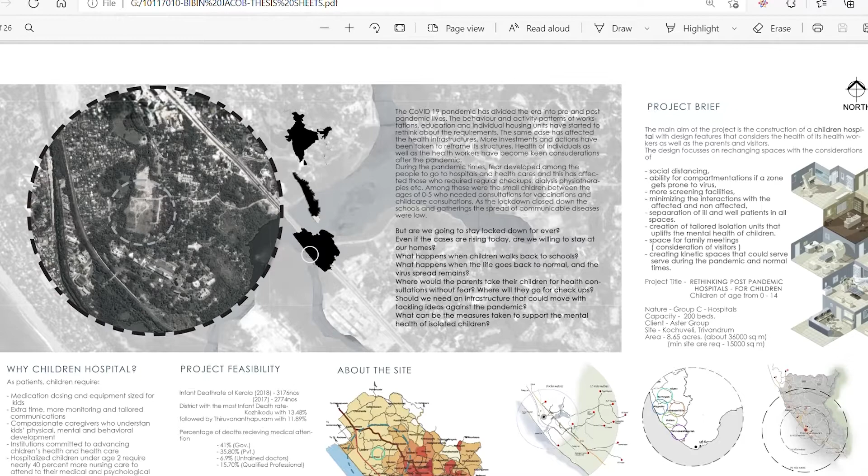Well patients, vaccinations, checkup operations, and regular acute disease children patients were confused about what to do, and cases have been reported about the denial of care to regular patients.

The following data shows the bed requirements and available beds in Trivandrum, the capital city where my design comes up. The density maps the reachable possibilities from districts due to NH, and statistics of birth rate show the requirement of a childcare hospital within the site.

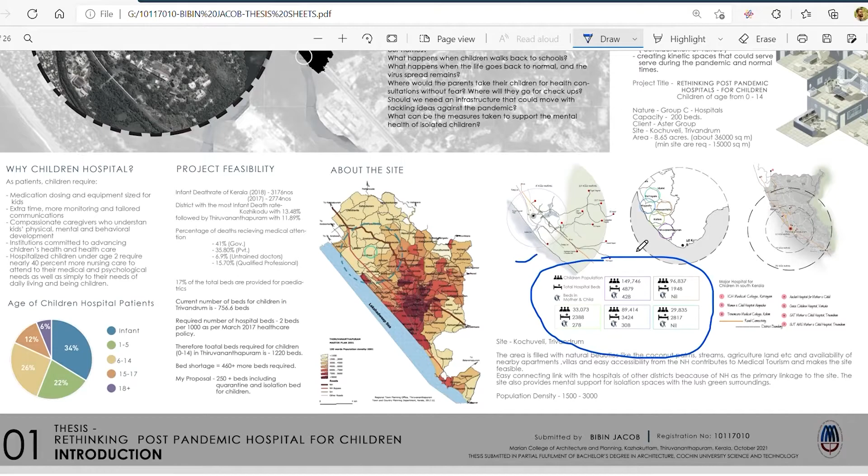During the development of the project, I worked on Rainbow Children Hospital as the major case study, to learn about new facilities, the SAT hospital for social improvements and working, and literature case studies for designs and concepts. The Rainbow Children Hospital is located in Banjara Hills, Hyderabad.

With a built area of 16,000 square meters, it runs with 70 plus doctors, 300 plus nurses, and 100 plus service staff. The site is located within a lower population density area in Hyderabad, creating a different environment and healing nature to children's care away from busy, noisy zones.

The figure shows easy accessibility due to the main road abutting the site that directly connects to the NH. The nearby metro stations, hospitals, and clinics help in easy accessibility and fast referrals with other care centers if needed.

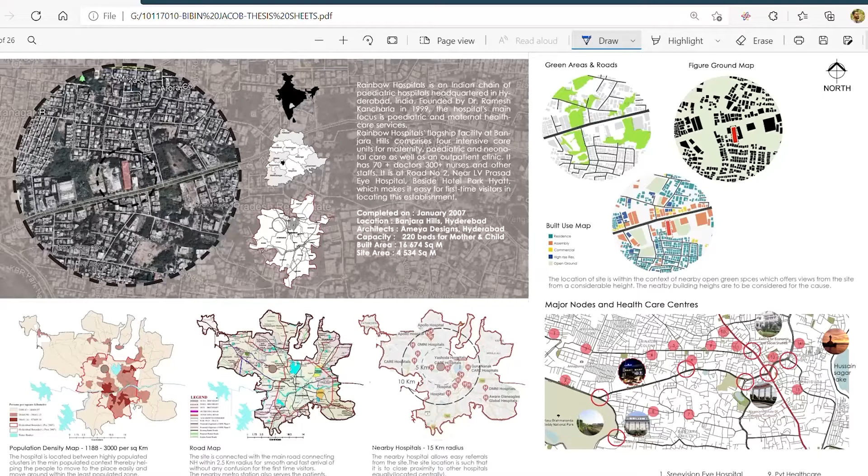The major wind direction from the west is clearly gained by the building due to the open spaces on the west, as seen from the figure ground map. The green areas to the west and east act as viewpoints from the site.

The built use map indicates the busy roads and traffic that could build up within the area due to the presence of assembly and commercial spaces.

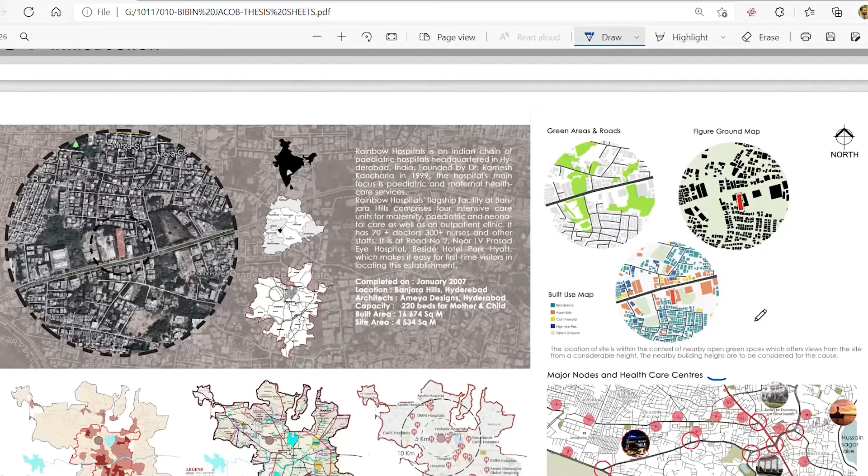The building is designed as three zones: the child care, common requirements, and the maternal care. The maternal care receives well patients and thus is separated from other busy areas where disease could likely spread.

The building orientation is such that it receives west winds for IP beds provided on upper floors, while the OP clinics, which are areas filled with infected patients, are zoned away from the wind on lower floors where wind gain could be less due to the presence of nearby buildings.

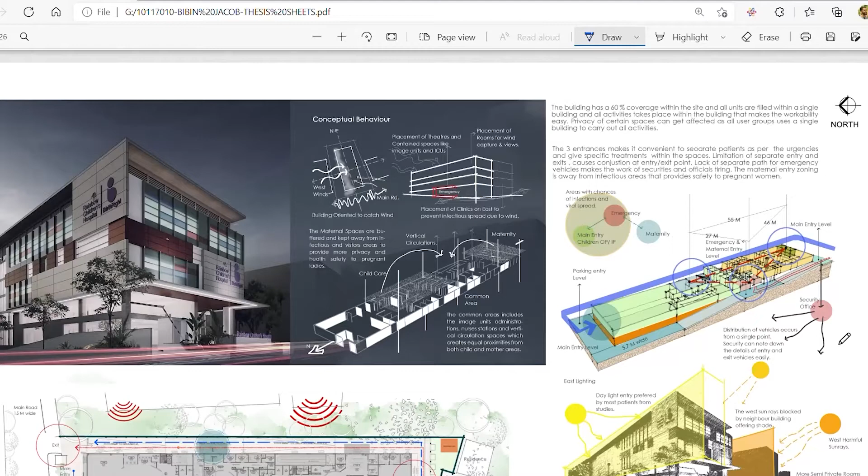The site plan indicates the three major entrances to the site. There is also a sub-road about 20 meters below the main road level for service vehicles.

The separate ambulance entries allow quick transport of patients to the emergency entry, which is a separate entry away from the other three entries into the site, to avoid contact with other vehicles and prevent other visiting patients from interference with critical cases which urgently require medical care.

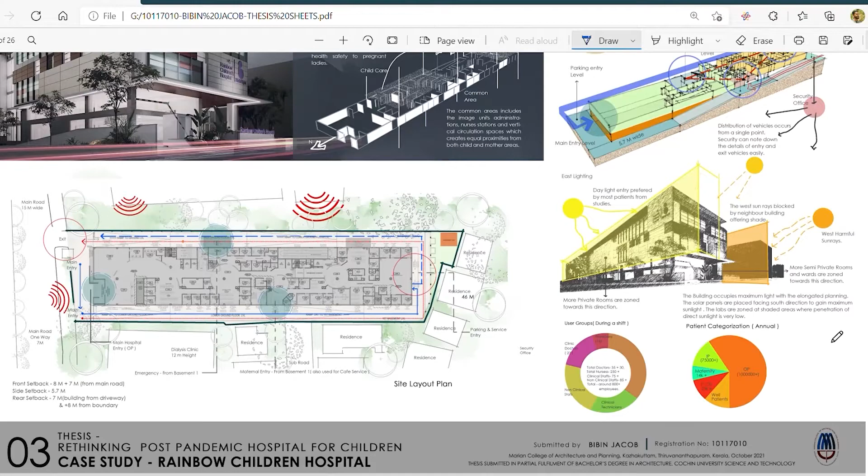VIP private rooms and IP beds are zoned towards the east direction where sunlight is received. However, the free facades used for hiding the service lines limit the sunlight entry and wind entries at certain locations. The west sun is blocked by the nearby building, creating shade to the main entry points, that is the OP and the maternal.

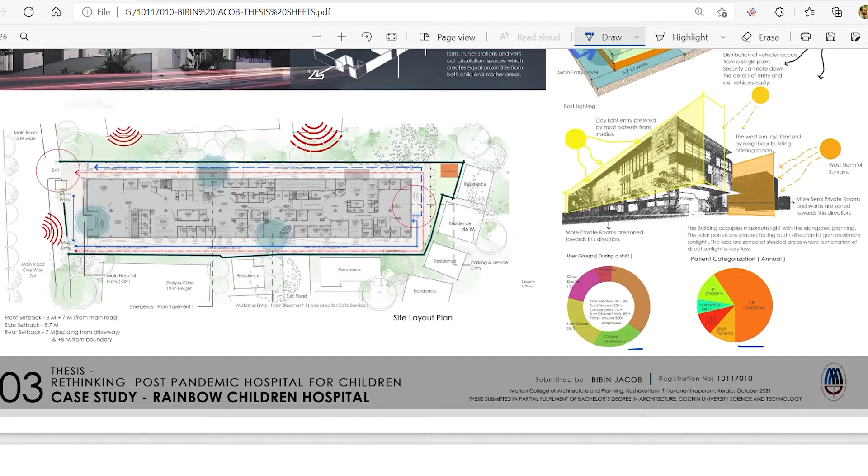User groups and patient categorization are shown here. The physicians are the full-time doctors managing the casualty. There are clinical and non-clinical staff, where doctors, nurses, pharmacists, etc. come under the clinical staff category, while cleaners, office managers, biomedical officers, securities, etc. come under the non-clinical category.

The ground floor area has the OP and the place from where distribution to other areas happens, and is the most densely used floor. The entrance, lobbies, pharmacy, and enquiry are zoned at the entry level from where each one gets separated. The entrance is also adjoined with a play area near the main lobby and waiting area.

The separate receptions for each department are placed linearly, connected with the main corridor, which helps people understand their destination. The separate receptions also help in controlling and regulating activities within each zone. The people moving in through the main entry include well patients, that is for vaccinations, baby checkups, etc.

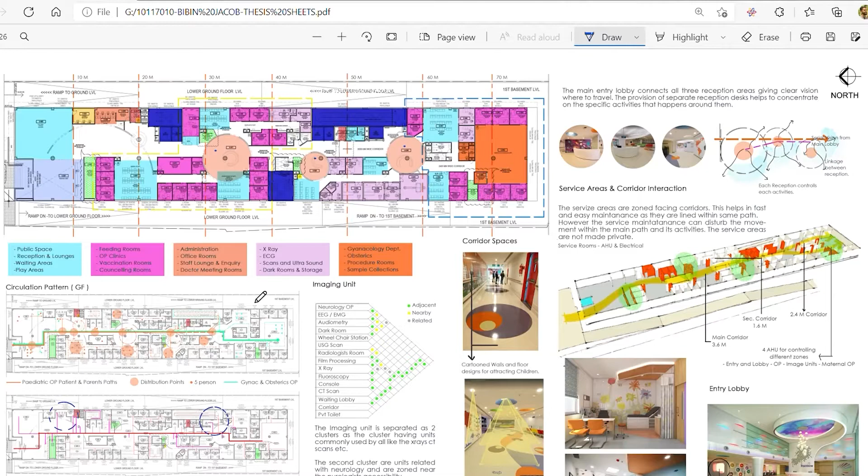Patients with viral disease and patients with acute care all use the same entrances, the same corridors, and the same waiting areas, which can lead to viral spread. This has caused the complete shutdown of the hospital during the pandemic after many were tested positive, including the staff.

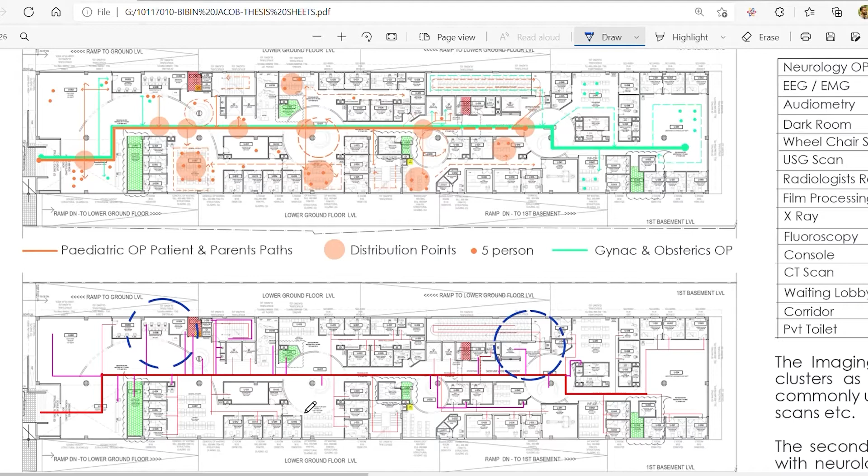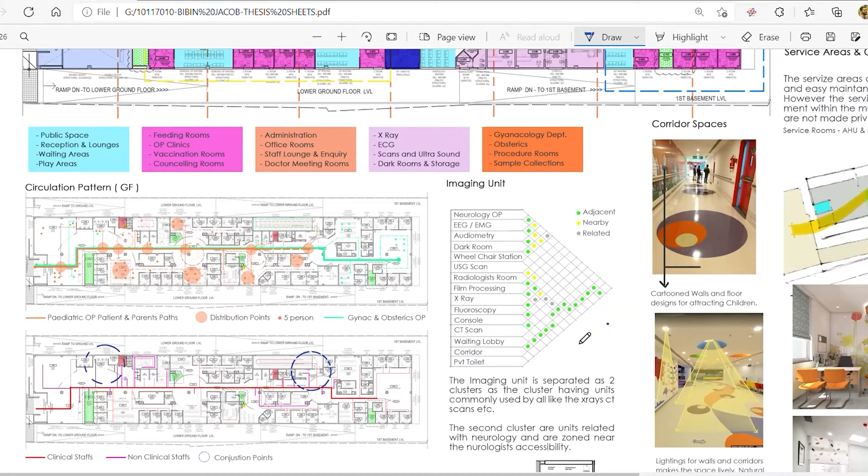The proximity chart shows the nearby and related facilities. The service rooms are shown towards the main corridor with lifts aligned along them, creating the corridors a congestion space where waiting for going to different floors, cleaning, services, managing, and the main traffic of patients occurs. The placement of stairs towards the corridors and service areas and lifts to the peripheries could have prevented this congestion.

The corridor spaces, clinics, and waiting areas have created playful paintings and floorings for depicting a children's behavior.

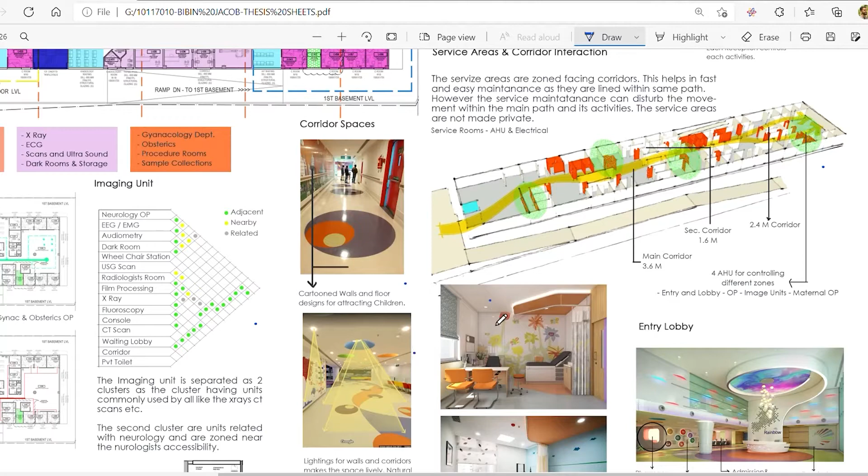The imaging units have been separated into two clusters: X-rays and CT scans, mainly controlled by radiologists, and others related to the neurologist, shown towards his consultation rooms. The typical consultation room includes the observation bed, wash and meeting areas.

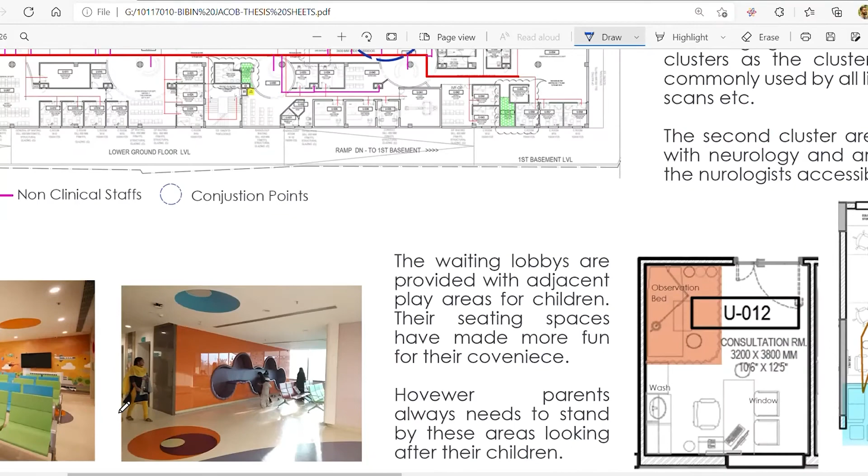The waiting lobby is adjoined with play areas where parents always have to stand by these areas to look after their children. The emergency entry, separated by levels on the lower ground level, is designed accurately to the patient needs.

The entry is adjoined with the main lobby, from where the bystanders move to enquiry or waiting areas, and the patients are taken into the triage units, where they are classified based on their seriousness.

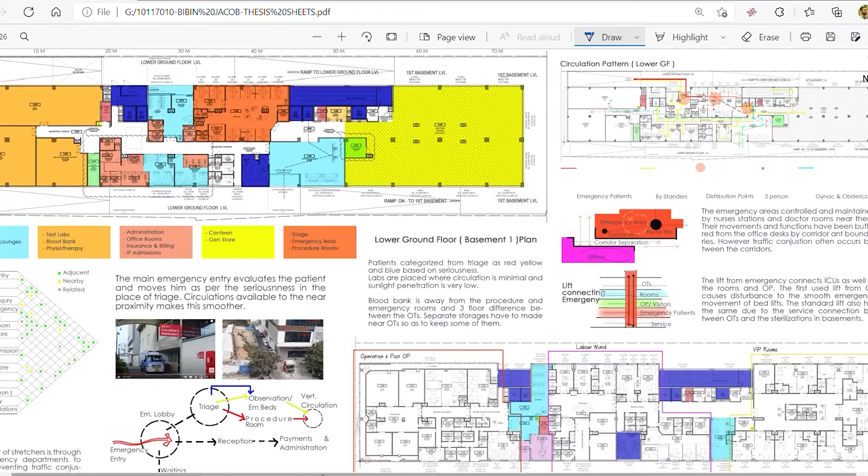The emergency areas are completely zoned in this area with workstations, doctor rooms, and lifts to move care units like ICU, ventilators, and OTs. The circulation shows the control of people entering emergency from the entry itself by providing waiting spaces, enquiries, and triage units adjoined with it.

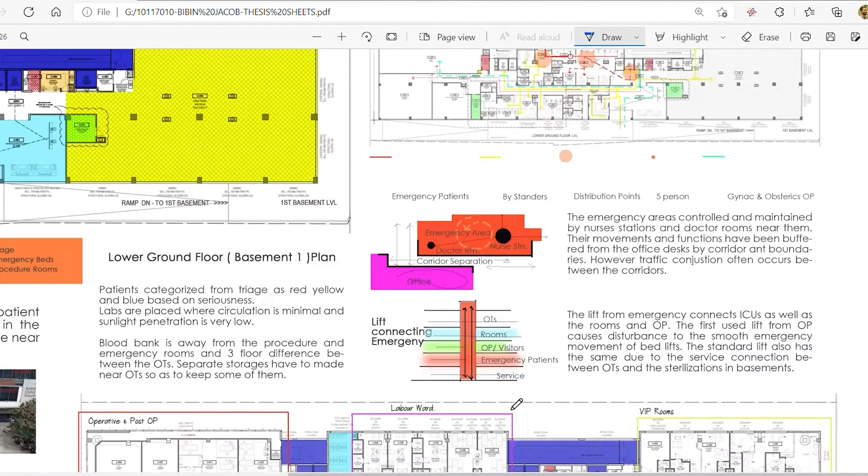The triage unit separates the patient as red, blue, and yellow, who require separate procedures as shown in the diagram. The movement of stretchers towards lifts for emergency patients is through separate areas from the main corridor for avoiding contact with other patient traffic.

Labs, blood banks, and cafes are zoned away from the emergency areas with separate vertical connectivity connecting them with each floor to create a separate functional space.

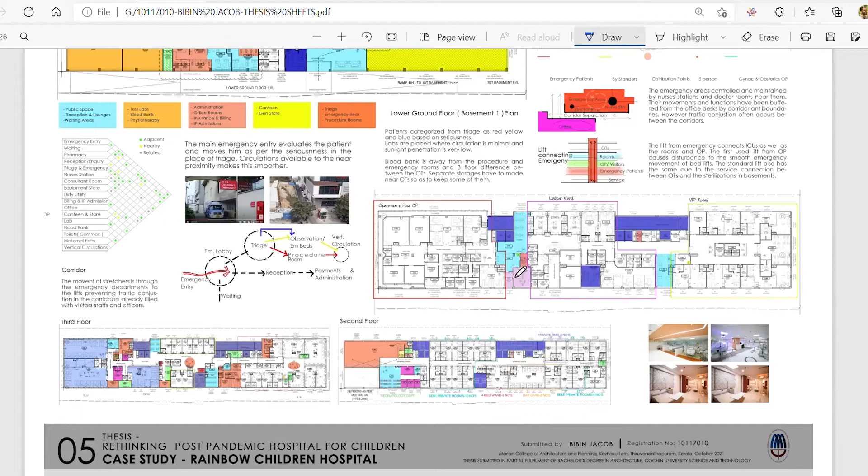The OTs are on the top floor, which comprises of OT rooms, post and pre-OT rooms, changing and discussion rooms for doctors and surgeons, and toilets. Dumb waiters and surgical pharmacies are also adjoined with the OTs.

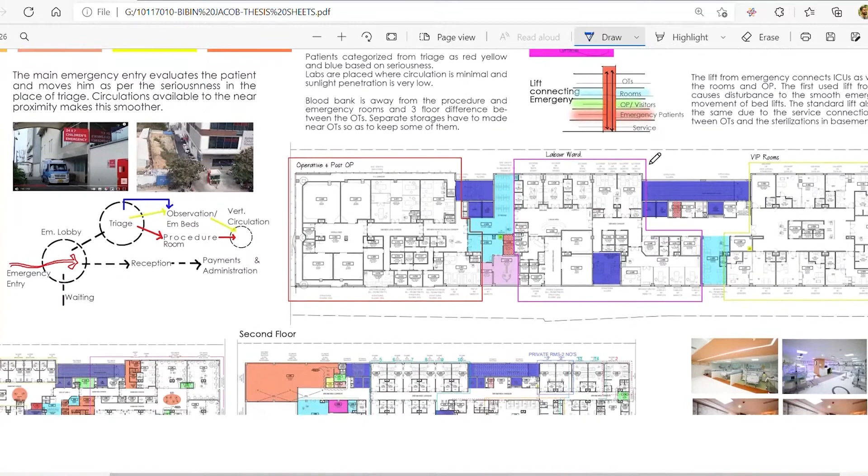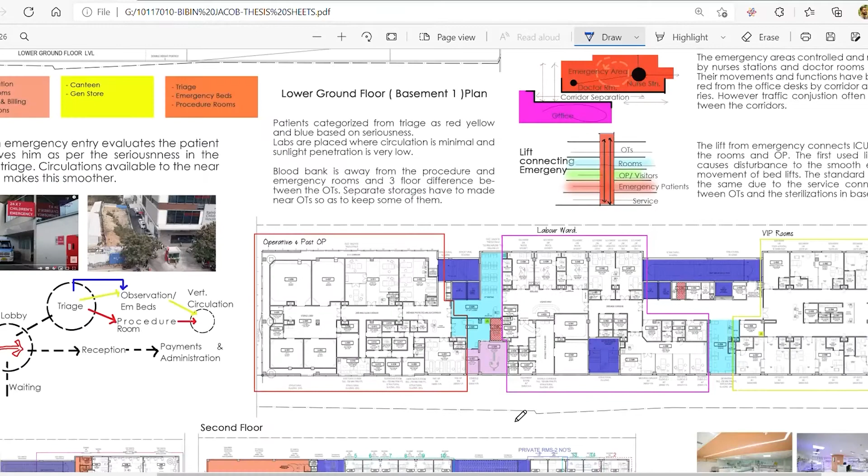The vertical lifts and stairs always land in the waiting or lobby of each section to create privacy within each space. VIP rooms are also placed on the top floor, where entry for normal people is not encouraged due to the sterile activities happening on the floor.

The administrative areas are shown towards the north side in the second and lower ground floor for easy communications and management. The service or the backbone of the building is depicted in the section, where the services are shown towards the basement and the functional part is stacked above.

There are bed lifts, standard lifts, service lifts, and dumb waiters that help in transferring things and patients by categorization. Bed lifts and standard lifts near the entry connect the major CSSD and dirty linen storage at bottom and the intensive care units.

This lift is also used by the people coming in, as they are zoned first, disturbing the travel and movement of patients.

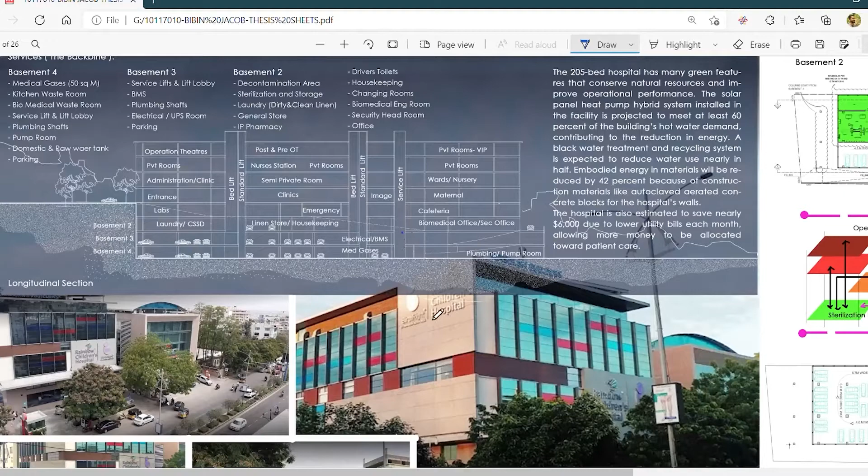The service lifts zoned towards the end connect the offices downstairs, which could have been connected with the CSSD and the laundries. The service movement within the basement too, with CSSD, laundry and housekeeping, is shown in the figure.

The zoning of the housekeeping office near the cleaning department helps in easy management. The below basement floors are accessible by outside technicians.

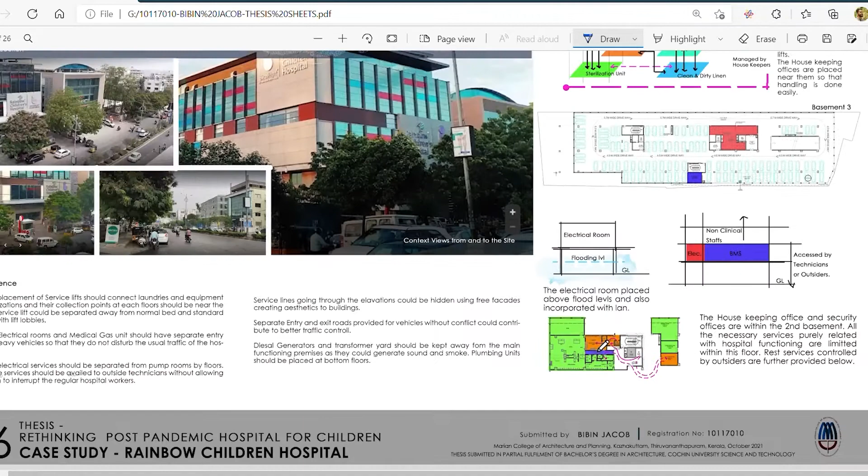The zoning of plumbing, electrical and gaseous units needs the help of outside service agents, which are zoned towards the bottom floors, creating a separate space from others and separate entry to the basement.

A literature case study on Nelson Mandela Children's Hospital was used to learn about the built and unbuilt relation that provides recreational spaces for children and patients.

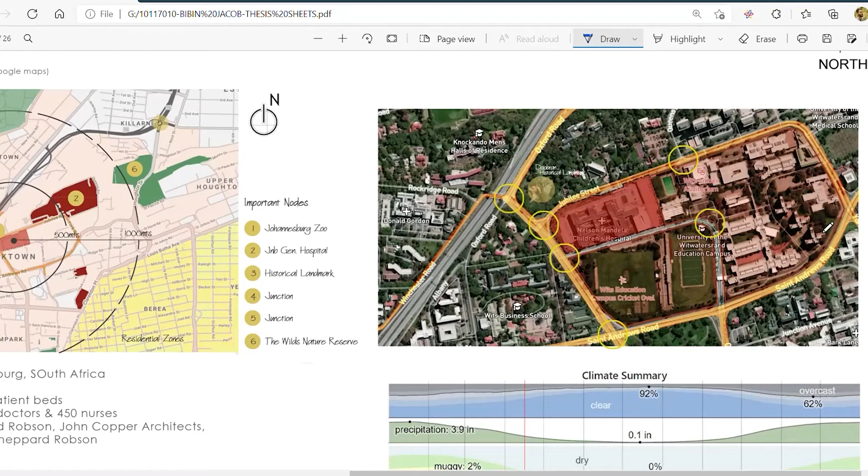The hospital is located in South Africa with an area of 29,900 square meters, with a capacity of 200 plus patient beds, 150 doctors, and 450 nurses. The hospital is located within an educational campus on a slopey site.

The design of the building is such that the OP is placed on the ground, the emergency care on the bottom, and services on the basements.

The zigzag pattern with niches created between the building floors retains wind and provides shade. These spaces have been used as garden spaces that provide leisure spaces to its visitors.

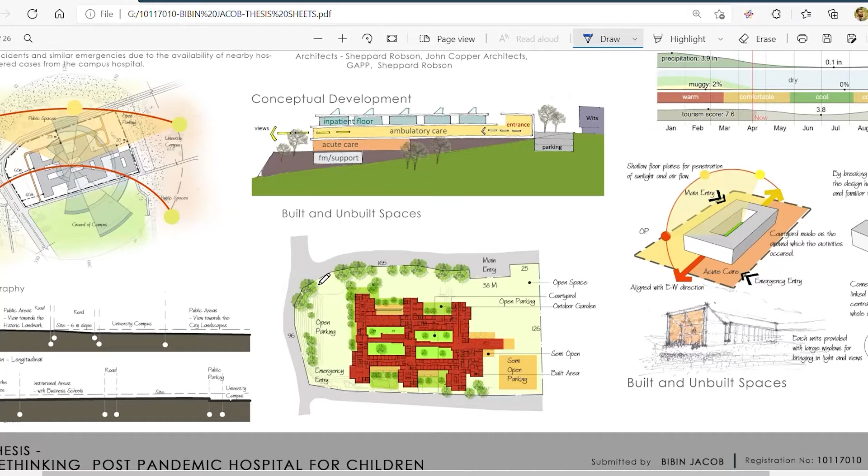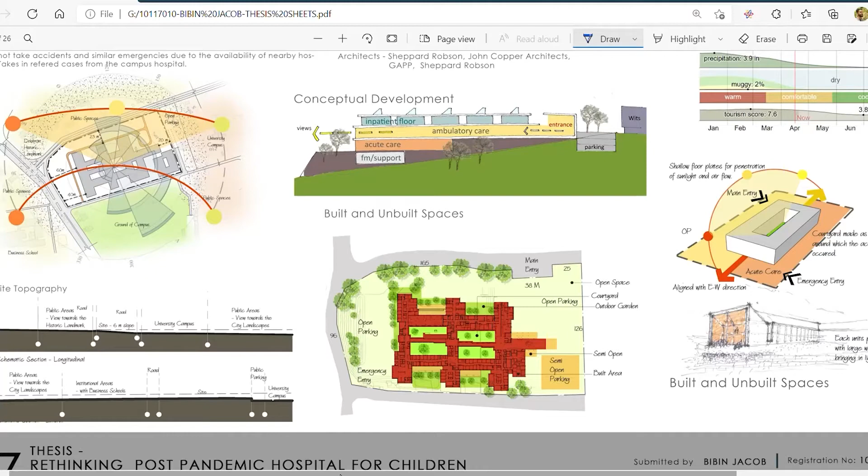The alignment of the building and provision of courtyard spaces between lights up the spaces and corridors, enriching the mental health of the patients. The hospital is divided into each wing with different activities.

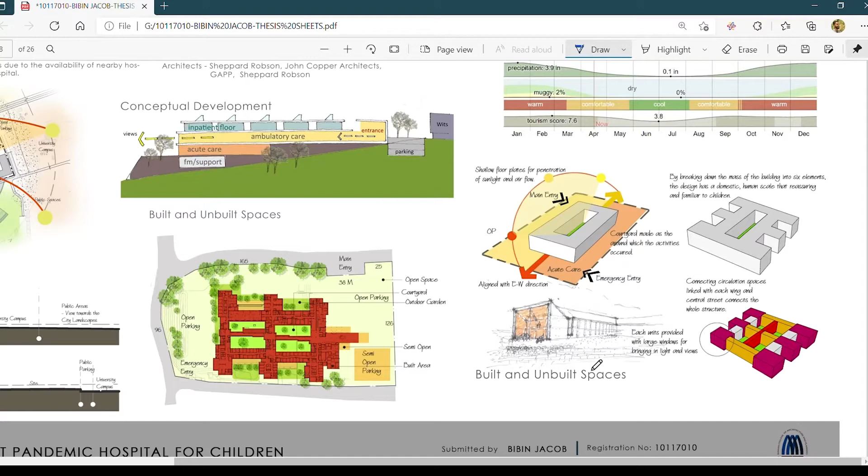This helps the people to move to the desired cluster easily. The site topography shows the views that could be captured from the building. The violet colored area shows the circulation spaces or the corridors, which are well lighted and accommodated with the views from courtyards and terraces.

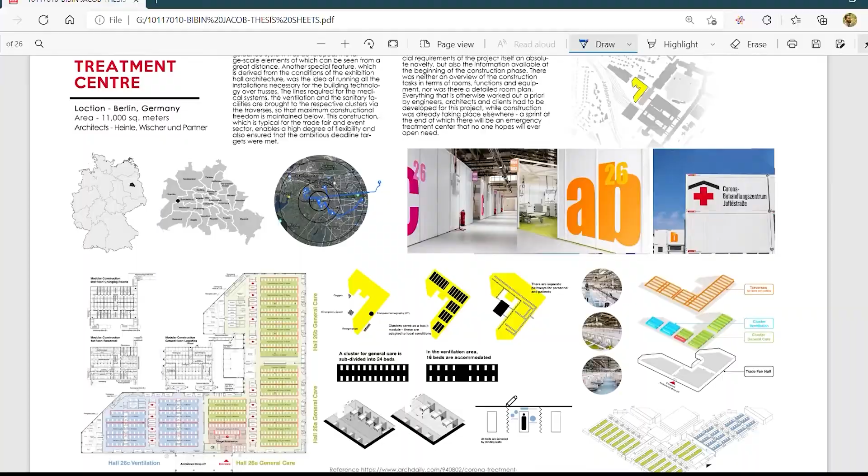The Corona Treatment Center located in Berlin shows the quick makeover of an auditorium to COVID isolation wards. The spaces required and their categorizations have been shown in the figures. The comparative analysis teaches about the change in spaces required as per the conditions.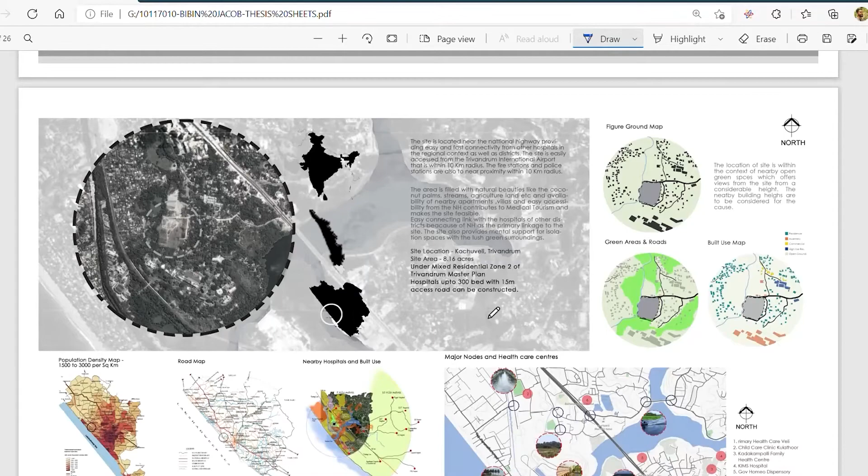The site is located near the national highway, providing easy and fast connectivity from other hospitals in the regional context as well as district. The site is easily accessed from Trivandrum International Airport, that is within a 10-kilometer radius. The fire stations and police stations are also in near proximity within a 10-kilometer radius.

The area is filled with natural beauties like the coconut palms, streams, agricultural lands, etc., and the availability of nearby apartments, villas, and easy accessibility from the NH contributes to medical tourism and makes the site feasible. Easy connecting links with the hospitals of other districts because of NH as the primary linkage to the site. The site also provides mental support for isolation spaces with lush green surroundings.

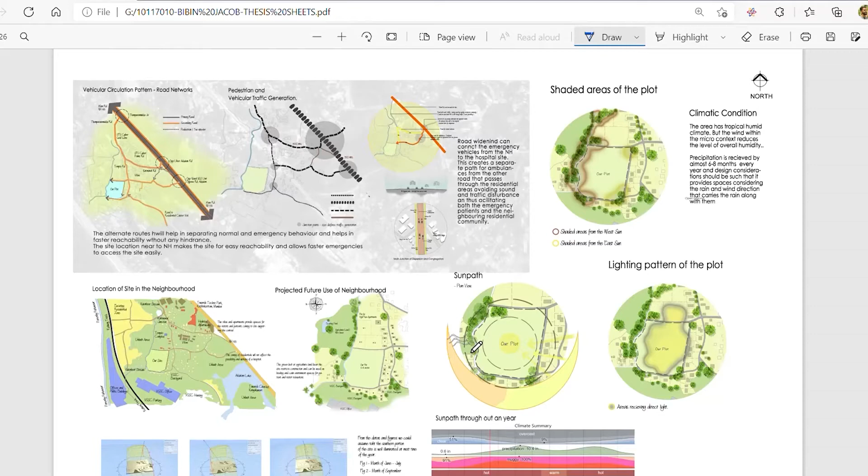The location of the site is within the context of nearby open green spaces, which offers views from the site from a considerable height. The nearby building heights are to be considered for the cause. The alternate routes will help in separating normal and emergency behavior and help in faster reachability without any hindrance.

The site location near to NH makes the site easily reachable and allows emergencies to access the site faster. Road widening can connect the emergency vehicles from NH to the hospital site. This creates a separate path for ambulances from the other roads that pass through the residential areas, avoiding sound and traffic disturbance, and thus facilitating both the emergency patients and the neighboring residential community.

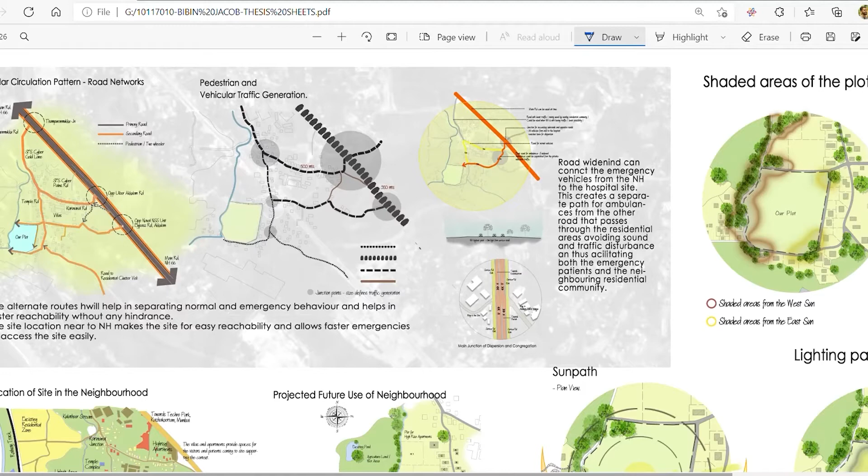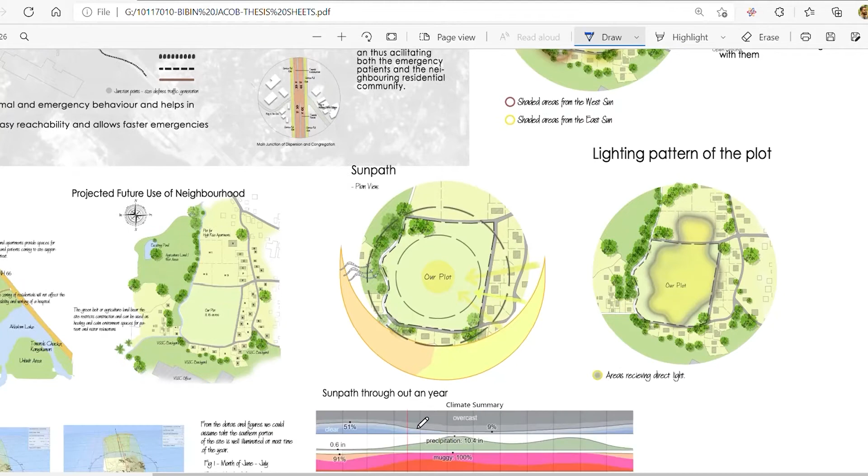The area has a tropical humid climate, but the wind within the micro context reduces the level of overall humidity. Precipitation is received for almost 6 to 8 months every year, and design considerations should be such that it provides spaces considering the rain and the wind direction that carries the rain along with it.

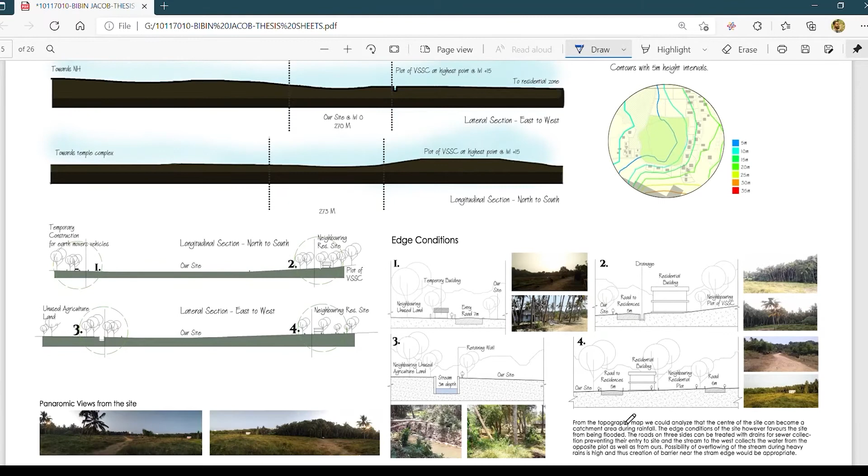From the topography map, we could analyze that the center of the site can become a catchment area during rainfall. The edge condition of the site, however, favors the site from being flooded. The roads on three sides can be treated as drains for sewer collection, preventing their entry to the site, and the stream to the west collects the water from the opposite plot as well as from ours.

The possibility of overflowing of the stream during heavy rains is high, and thus creation of a barrier near the stream edge would be appropriate. As the central portion is highly exposed to the sun, the water evaporates quickly, while the shaded areas to the east and west have the most stormwater percolation into the ground.

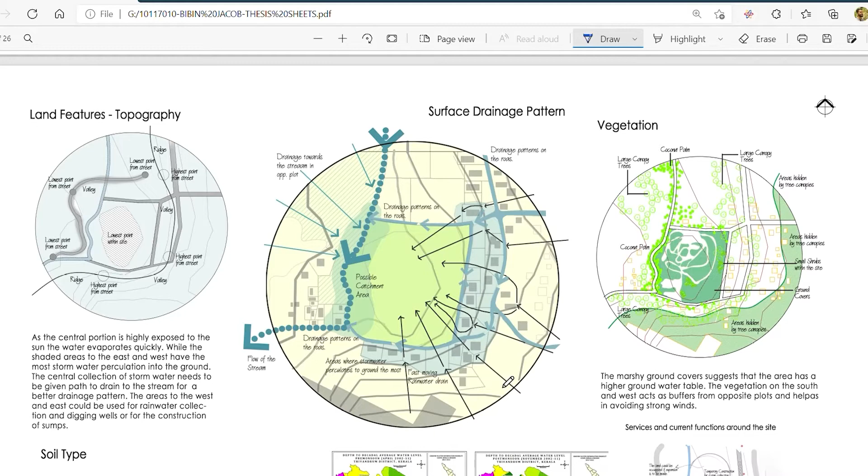The central collection of stormwater needs to be given a path to drain to the stream for a better drainage pattern. The areas to the west and east could be used for rainwater collection and digging wells or for the construction of sumps.

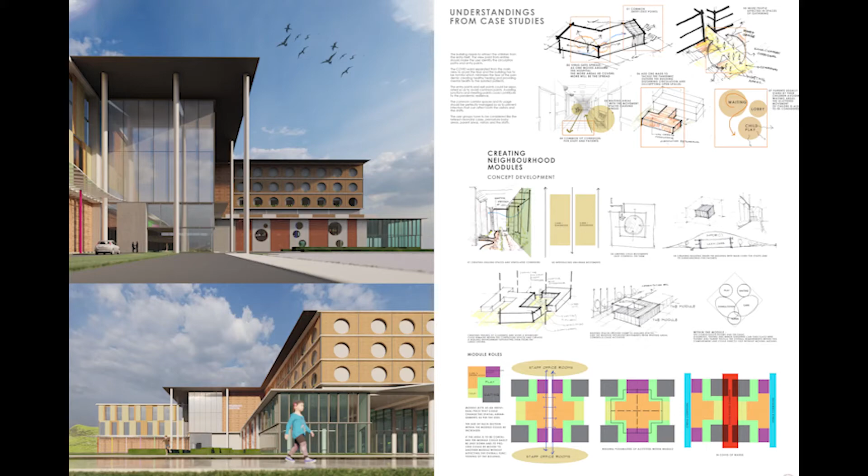The ideas that struck were to create a covering within a cover, where the outer core was used for the regular movements and the interior core protected the staff. The second point was to create a unilinear movement pattern for users that limited gathering points. The movement control of children was mostly looked into.

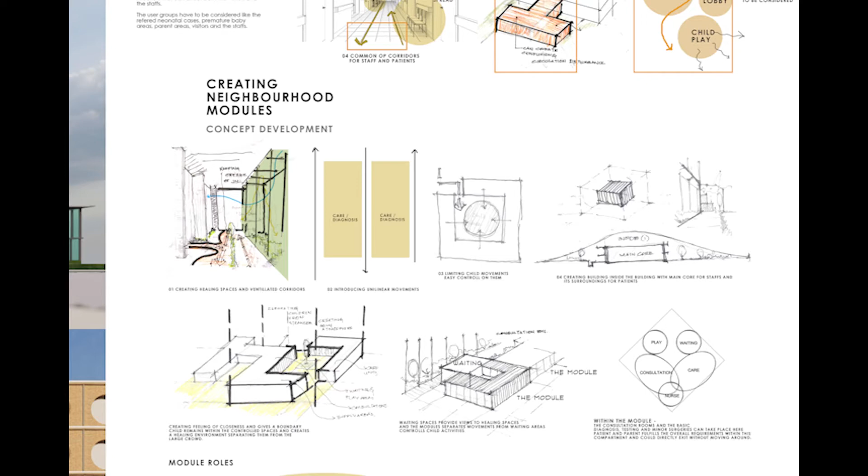Their irregular and uncontrolled movement makes them an agent of viral transfer. Hence, their areas of interest like the play areas had to be bounded, and they had to be kept within the specified places with their parents. These thoughts led me to create the concept of neighborhood modules. As the name says, the module acts as a neighborhood that solves their problem within their space.

These modules were created by incorporating the care, the observation, the test rooms and collection areas within a particular module, controlled by the consultant doctor within the module. The waiting areas and play areas are brought inside these cubicles, which limits the children's movement.

The children within these cubicles are separated from the outside movement and crowd, contributing to their mental health. The patient could directly leave the building once they exit from these modules incorporated with all functions. This limits the movement of going around to find spaces that offer different roles.

The modules are kinetic modules that can change their usage as per the needs. The spaces within the module can be resized, closed for fumigation without affecting other functions. During a surge, these modules could completely be used for accommodating the increase in patients by rearranging the partitions.

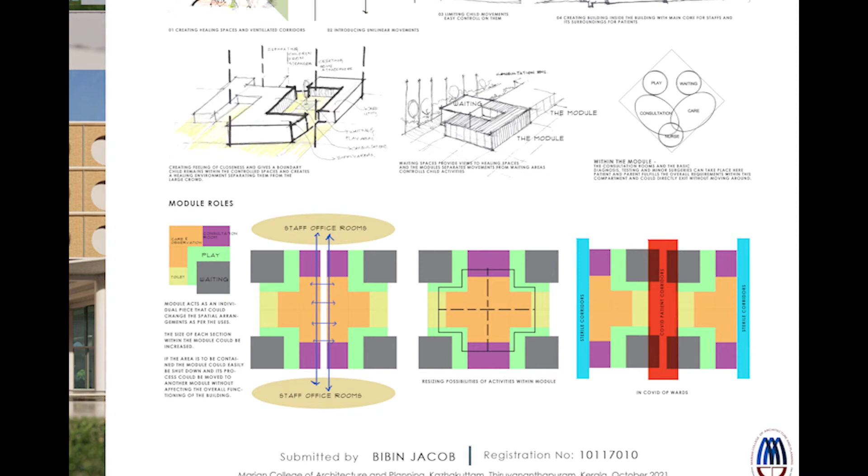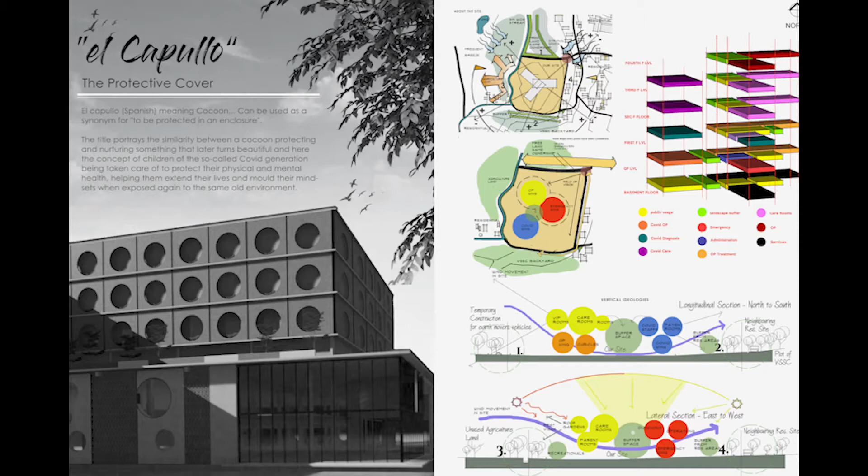The rearrangement of modules at different spaces during different times is shown within the figure. This helps in creating flexible spaces within the building that could serve the crowd accordingly. These protective coverings give the project its name El Capullo, which means cocoon in Spanish, that acts as a protective cover within which the young ones are taken care of, protected from the outside environment.

The site zoning and layout shows that the entry point has been designed so as to give a clear field of vision to the whole main building. The user easily identifies the emergency and the OP/IP wing. The COVID or isolation ward is separated from the direct field of view. Its entry is separated by level differences from the main block.

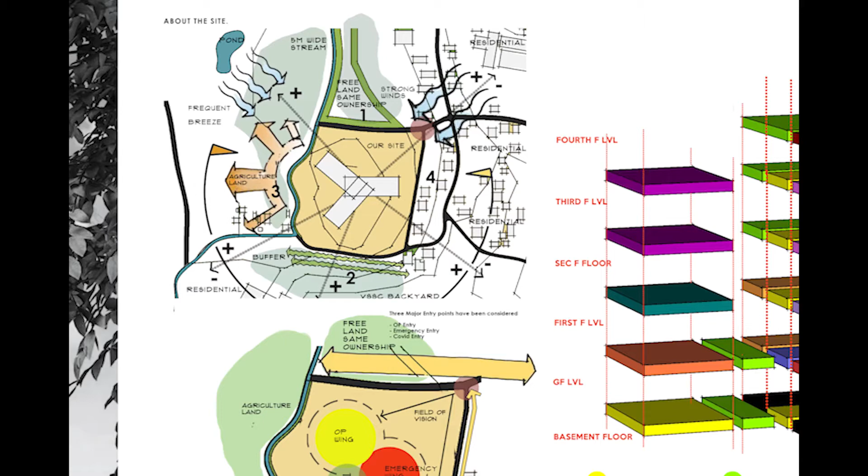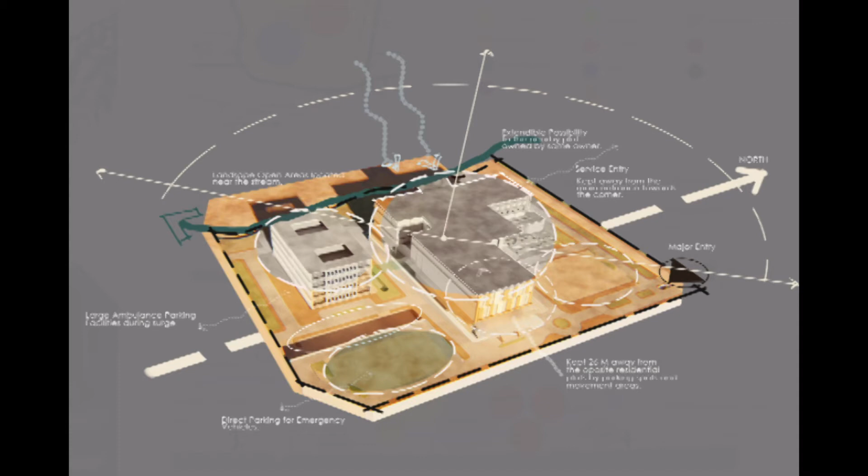The geometrical patterns and colors of the facade attract the children. The building is kept away and buffered from residential areas by 25 to 30 meters. The blocks are placed such that they capture the most views and major winds from the northwest direction. The entrances, the play areas and parking towards the north offer shade. The COVID block in the south also offers shade to the southern part of the main buildings and its courtyards.

The vertical zoning of the building shows the services provided to the basements, the care rooms placed at heights that give the best views, separated from the normal OP patients. The operation theaters on the top floor minimize the users accessing there, keeping it sterile and safe.

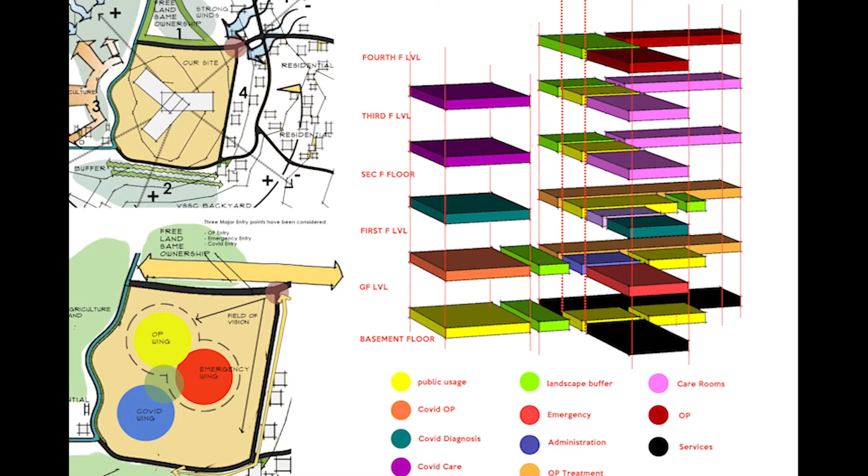The security rooms are placed at the entry and exit points. The same location makes it easier for control. The electrical room with VCBs at the front, which the KSEB line connects, makes it easy for outside electricians to access them without disturbing the hospital circulation.

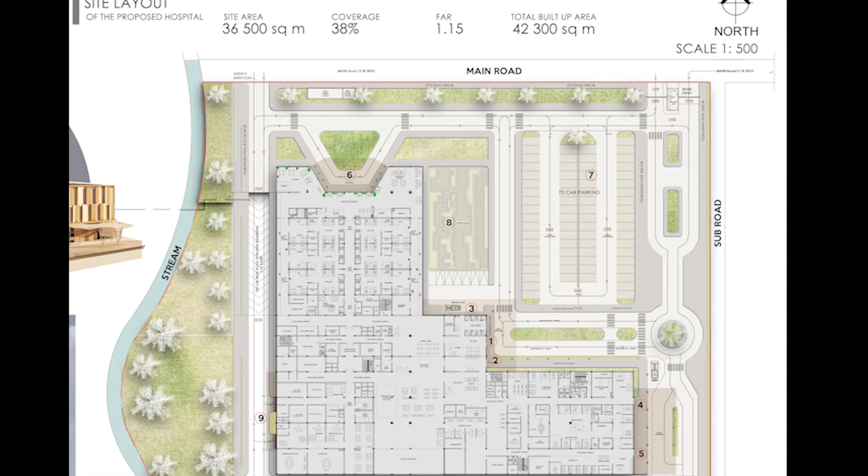The heavy vehicular circulations are designed and zoned away from the entries and exits where the children are in movement, providing them safety. The number 7 car parking areas are used by visitors and OP patients after they drop the patients at the number 1 and number 2 entry points, which are the outpatient and the main entry.

Number 3 is the ambulance bay from where the patients tested positive are taken to the isolation ward in an ambulance. Number 8 is a landscaped garden area that creates a buffer for children from accessing the vehicular traffic area. Number 6 is the OP exit porch, zoned away from the usual traffic and entrances, making it easy for public vehicle transportation. The different entry and exit points are designed so as to create a unilinear flow.

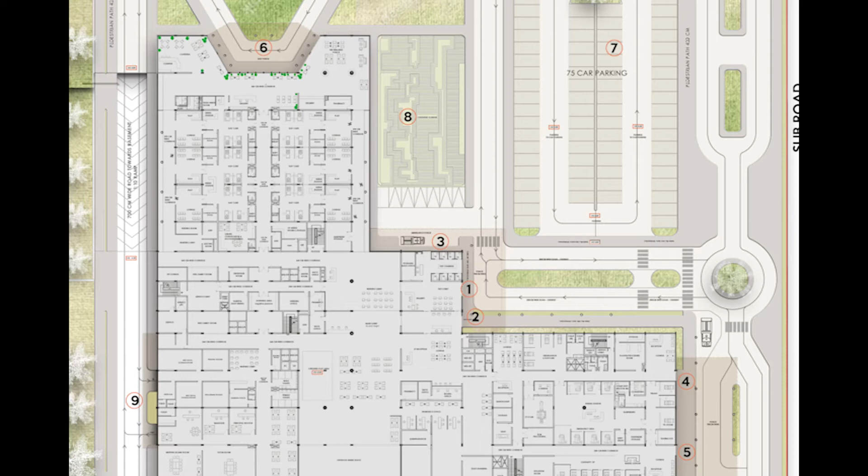The service entrances are for doctors and service vehicles who directly move to the basement that has its entry point at point number 9. Points 4 and 5 are the emergency entrances, which could directly be seen from the entry point, which helps the emergency vehicles to move swiftly. Point 10 is the entry to the isolation ward, which is kept away from the main block.

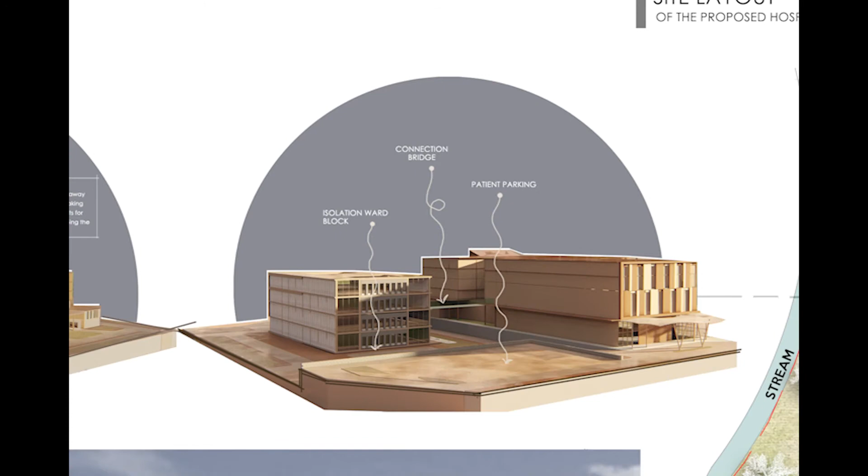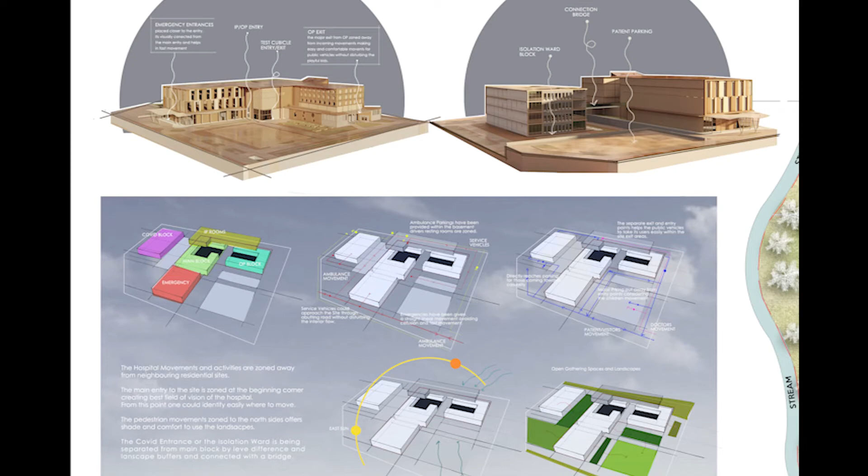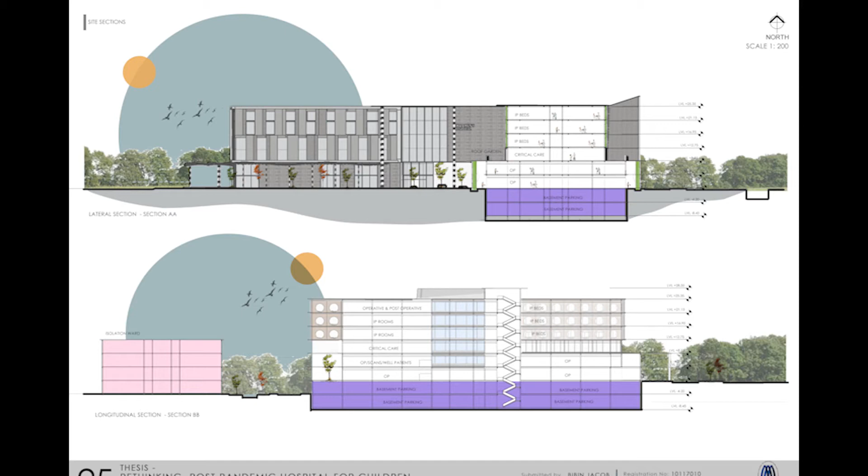The basement at -4.2 meters has the canteen, the CSSD areas, the staff rooms, ambulance parking, laundry, etc. The second basement at level -8.45 has the gas plant, the pump room, the fire rooms, etc. The incinerators are zoned to the terrace area. The inpatient beds are zoned towards the top floors. The lateral section describes the spaces through the outpatient department and the entry levels.

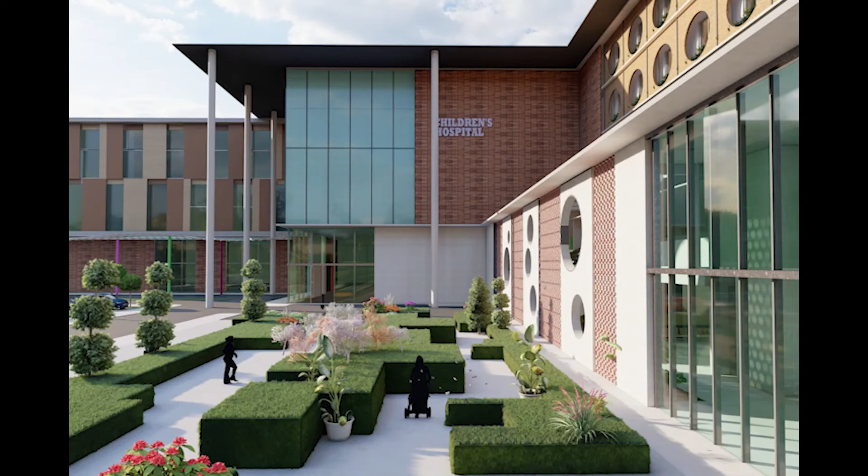The special topic is to create healing architectural spaces, for which I have introduced green pockets, roof gardens where children and parents could interact, intermediate courtyards, etc. The healing spaces uplift the mindsets of the children and provide a feeling of care to the parents. The use of colors inside and outside the building, and the spacious and vast lounges and waiting halls contribute to this cause.

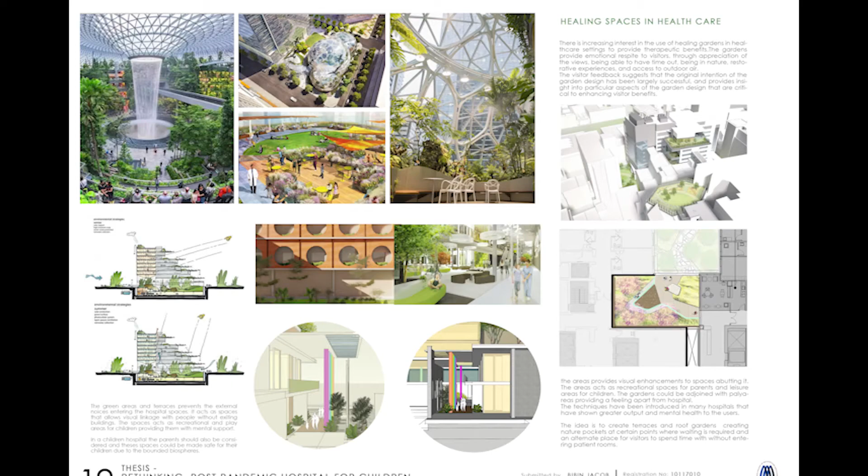Coming towards the ground floor planning, the two wings are the emergency wing and the OP wing. When we look into the emergency wing, there are two entrances. The first one is for accidental and critical cases. The second is for the fever clinics for children with viral diseases.

And moved for isolations and observations, which are negative pressure rooms if the disease is communicable. They are moved to the isolation block as per the conditions. The accidental cases move to triage and get treatment as per the level of criticality.

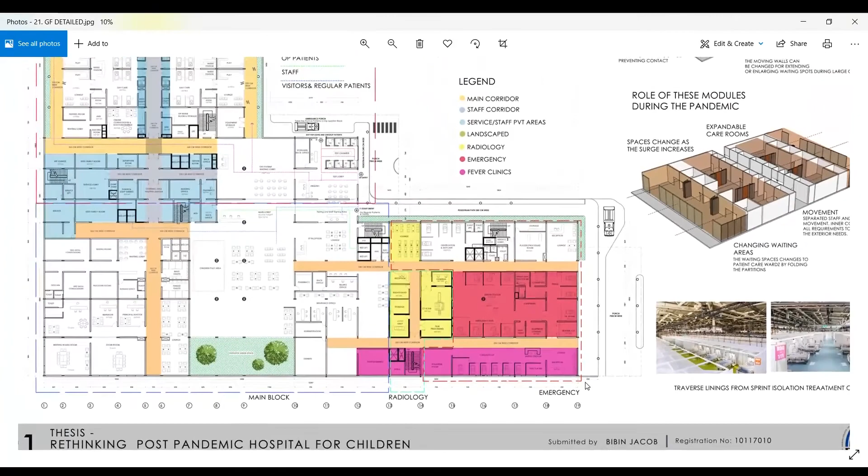The bed lifts connecting the operation theatres, ICUs, etc. are being zoned towards this area. The dumbwaiters and the service lobbies and stairs are connected with the operation theatres, the ICU collection areas, and move to the CSSD in the basement where dirty and clean utilities are stored. The radiology area separates the emergency and OP and serves both the users in the emergency and OP area.

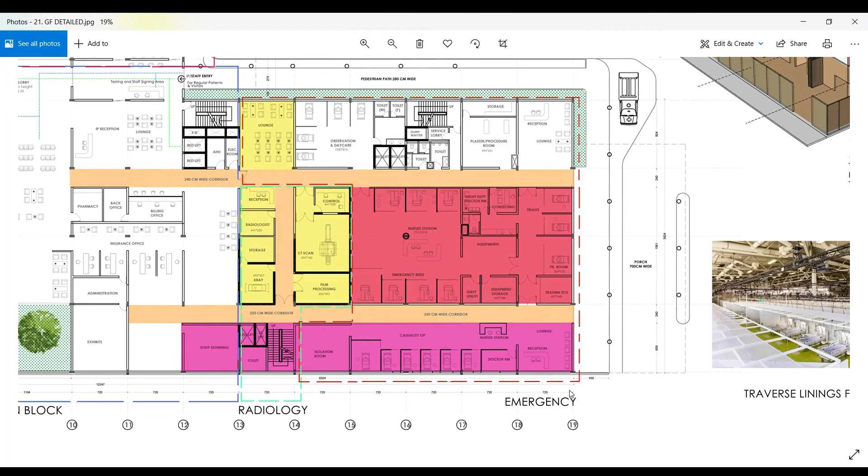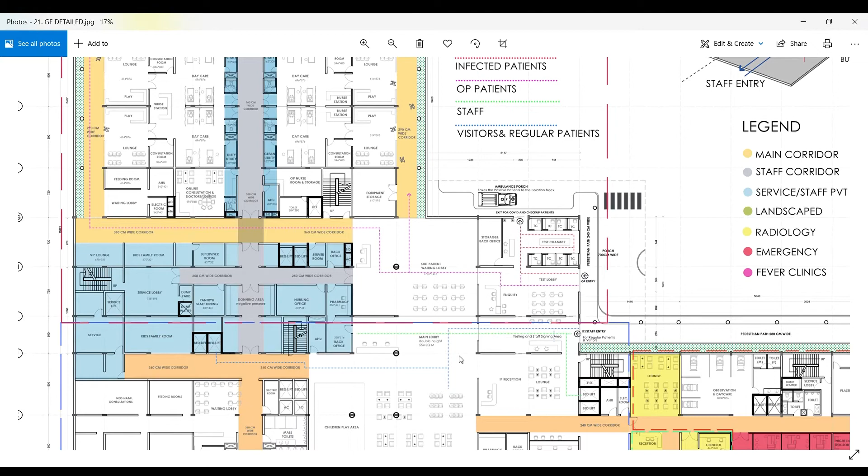The main entrance to the hospital is divided in two. One is the outpatient entrance and the other the inpatient or staff entry. Through the OP entry enter the patients, who are led to the testing chambers after checking the temperatures. The decision to move in or out is taken here. The positive patients move out to the ambulance porch or exit from the building. The others move to the lobby from where they are directed to the OP clinics.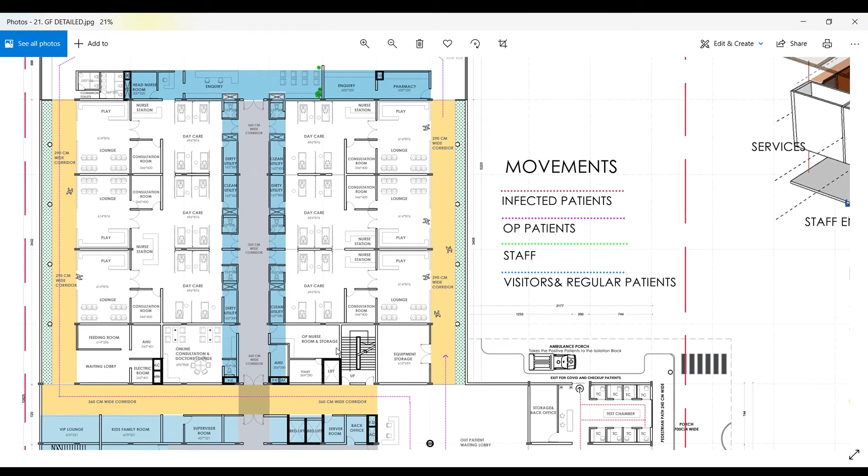The OP clinics have the neighborhood modules controlled by consultant doctors. The patient and the parents move to the waiting areas inside the module, separating them from the outside movement. The parents could easily control their children within the module, which provides a small play area. The play areas of the attached modules are visually linked with self-cleaning glass partitions. After consultation, the whole procedures are done within the care areas looked after by the nurses, and the users exit the modules after completing all the procedures.

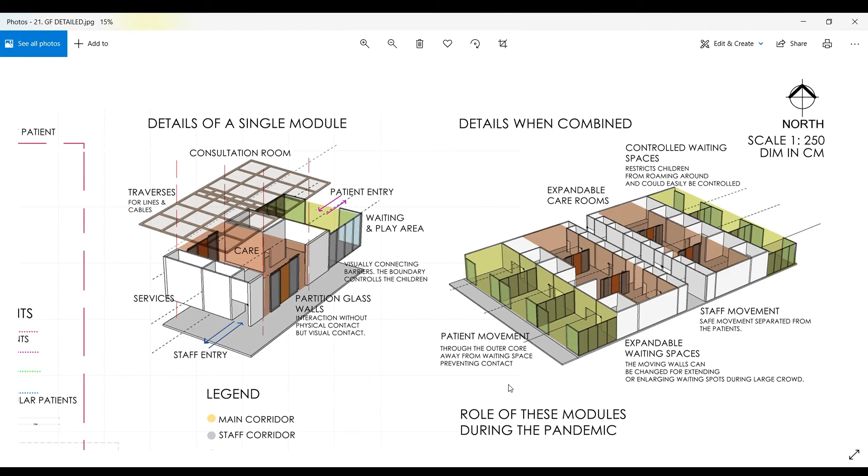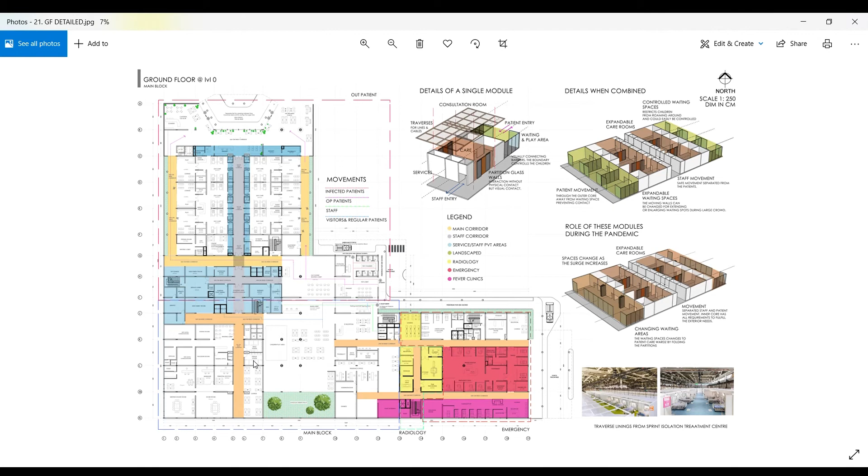Thus the movement will simply be from entry, the testing area, the main lobby, the modules, and on to the building's exits. The blue areas are the staff areas and the grey corridors are staff corridors. The attachment of modules is made such that the outside users move through the outside of the core. The grey staff corridors connect the service area of the modules, creating separate movement and easy management of activities. The staff areas are zoned towards this direction, from where all different activities are zoned with equal proximities. Service lobbies and service lifts are connected to the staff areas on all floors, all zoned towards this same direction.

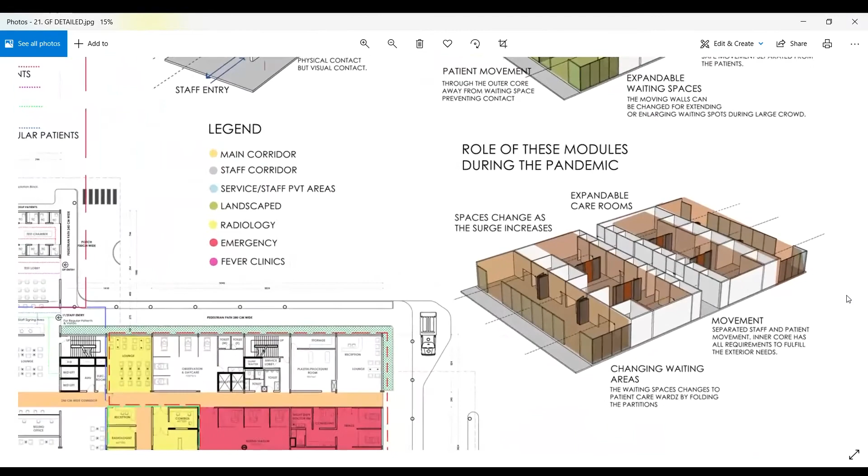Now, what happens during a pandemic surge? While the modules had waiting spaces which could change the spatial requirements by moving the partition walls during normal times, when the surge increases and there are minimum visitors and OP consultations, these waiting spaces of modules could change to care areas for increasing the bed capacity. During that time, the area of care rooms doubles compared to

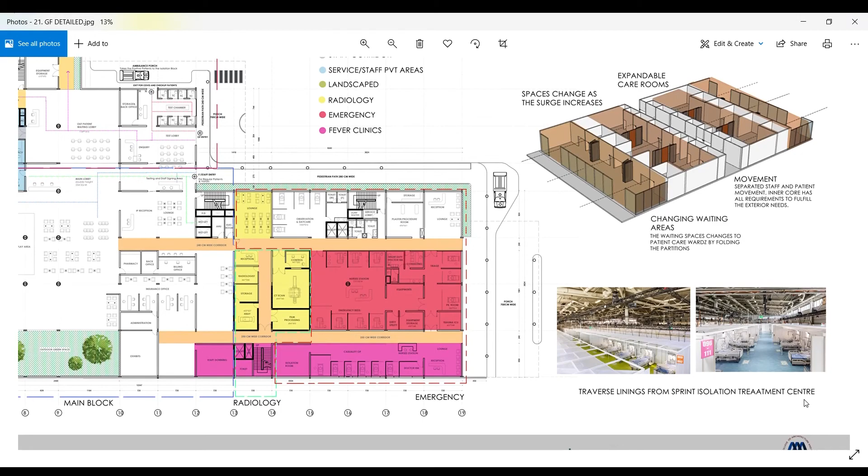normal times. The electrical lines are taken through the traverse lines on the ceiling. The image shows the traverse lines in Sprint COVID Isolation Center, which was built in just a few days. The entrances during the surge time could be made from the openings used as exits during normal times. Thus the hospital acts flexibly: it is surge ready and can also be rearranged back towards normal conditions depending on the situation.

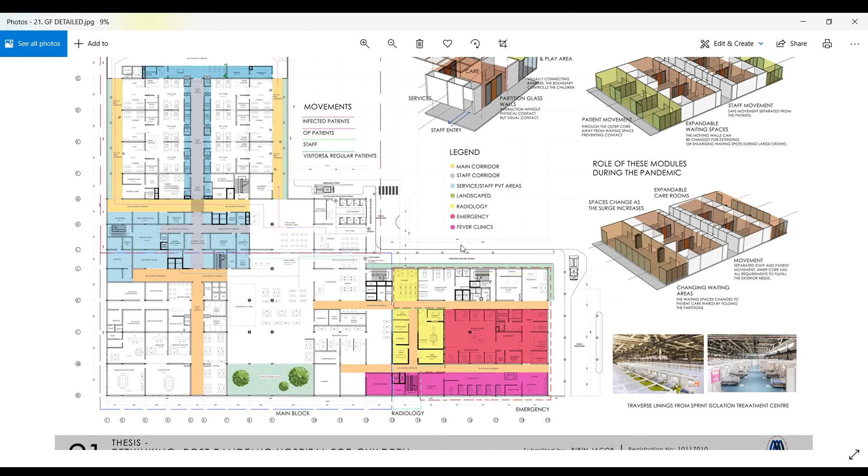The IP wing or the main hospital lobby is entered by the staff and regular patients, that is, the patients for dialysis and regular checkups. The IP exits are also from here. The wing has the principal doctor areas and the administrative areas. The large double-height lobby adjoined with outdoor courtyards, the green spaces adjoining the sides of patient corridors, the colored pillars, etc. make the spaces lively and create healing spaces.

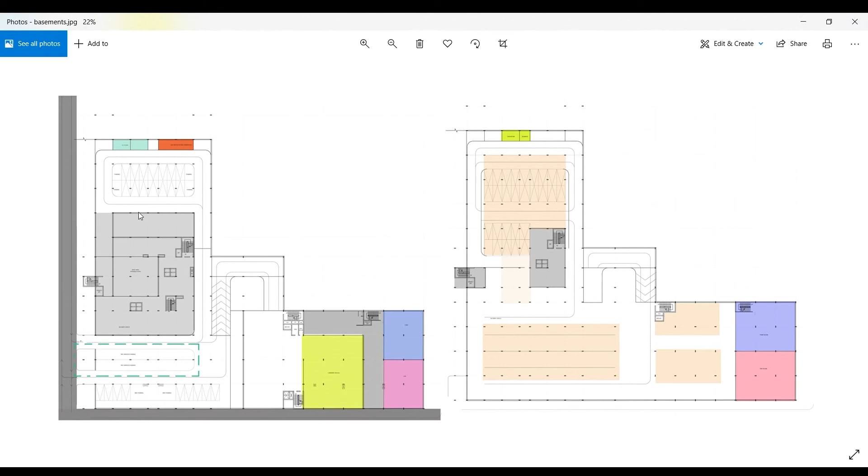The basement floors have the staff areas, the CSSD, the labs and the canteens. The CSSD and labs are separated by sterile corridors. The canteen is zoned to a place where ventilation is possible and service vehicles could easily come in. The pump rooms, fire rooms and gas plants are placed at the second basement. The first floor has the OP clinics for regular patients and neonatal babies and vaccination rooms. Even during surge times, the babies could be brought to the hospital without any contact with the diseased patients. The scanning areas are zoned towards this area above the radiology unit, allowing easy interactions and workflow.

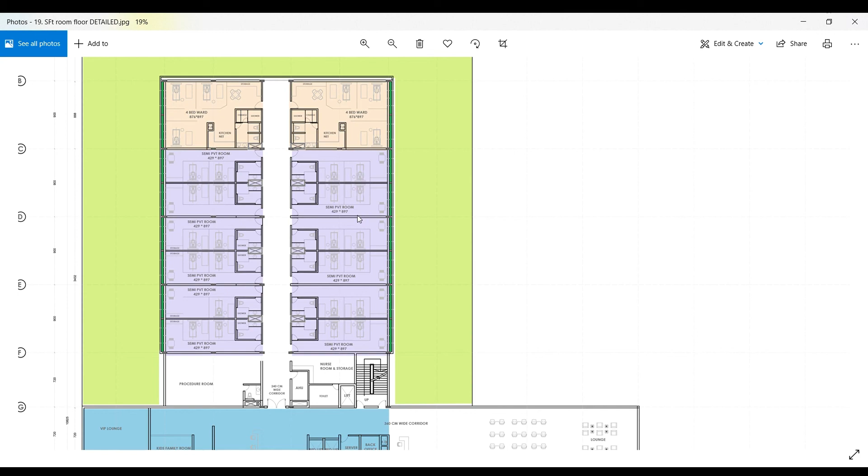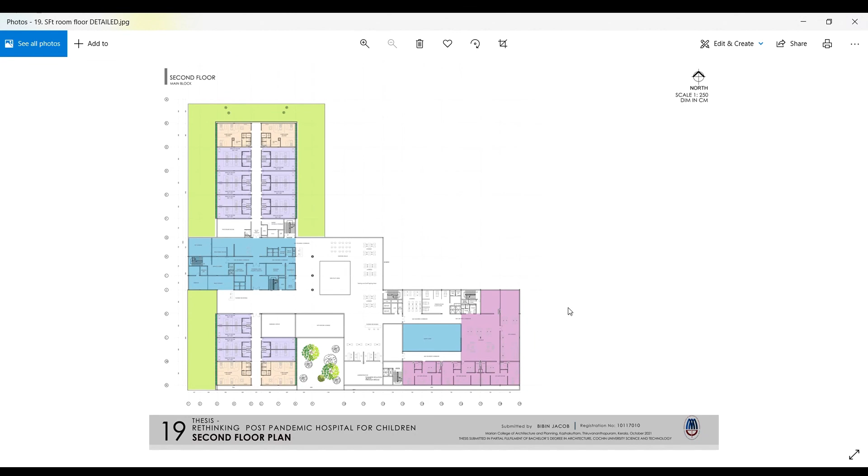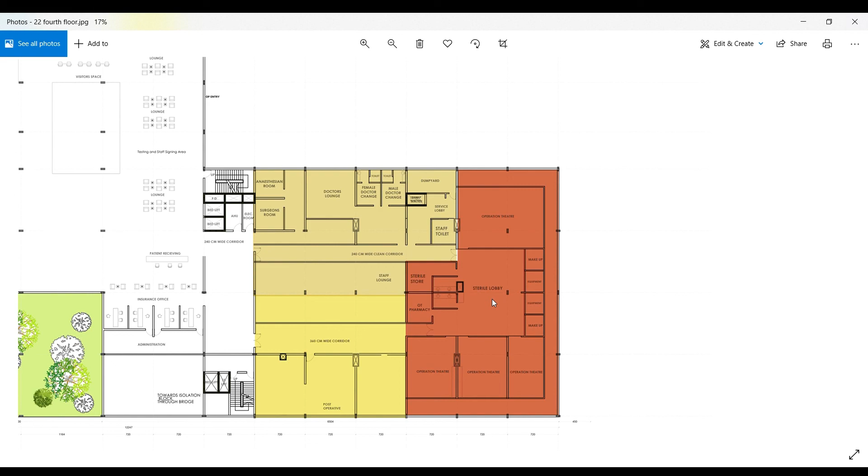Operation theatres are zoned to the top floor. The area is designed with sterile corridors, the doctor or staff areas, and the pre- and post-operative areas. The dumbwaiter provided here takes the equipment straight to the CSSD at the basement.